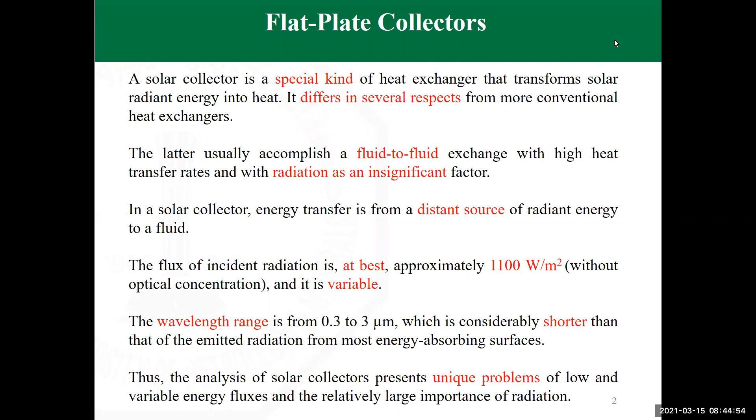Flat plate collectors can be designed for many applications that require temperatures to be heated up to values of 100 degrees centigrade above the ambient temperature. They have the possibility to use beam radiation and diffuse radiation. They do not require tracking, and that's why they need low maintenance, and they are easier to manufacture and cheaper in price. They are mechanically simple, as you will see.

It's just an absorbing plate and one or two covers and tubes, which are basically attached to the absorbing plate, or channels—tubes for heating liquids and channels for heating gases, water or air, for example. The major application of these units is for solar water heating, building heating, air conditioning, and industrial process heat.

Passively heated buildings, that's something you can see a lot in the West, in Europe as well as in the United States, where many houses have what they call a sunroom, which is a room where the roof and walls are basically made of glass. Why is that?

Because as solar energy comes, which is not as frequent as we have here in these places, the greenhouse effect would be there, and the sun would be a source of heat to heat these rooms. People would sit in these rooms in the winter to enjoy the sun and get some heating without using any devices. That's why they call it passive heating. You are getting heat without having to utilize or spend energy to generate it.

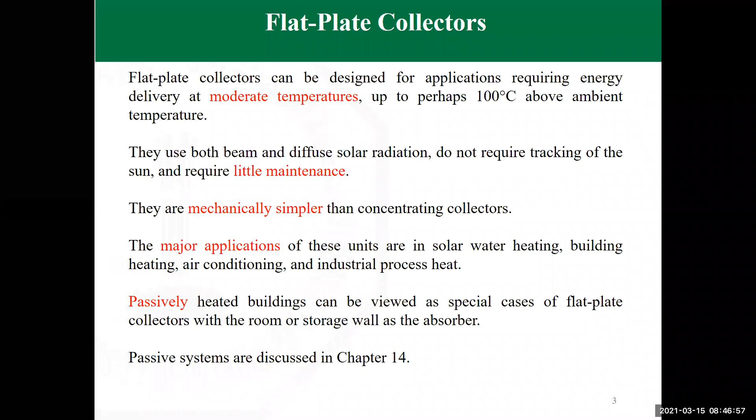As an application, passive heating systems can be seen in chapter 14 of the book. The importance of flat plate collectors in thermal processes will be treated in considerable detail in this chapter, so that we understand how its components function together, how heat transfer takes place, and what modes of heat transfer are there.

And why you are using several components - like, for example, what is the use of the covers? Why sometimes one glass cover, why two glass covers? These are things we are going to establish knowledge about, or at least discuss, in this chapter.

In many cases, for practical reasons, the analysis of flat plate collectors is simplified to a very simple form so that it can be used easily by engineers in terms of evaluating performance, design, or even comparing between different types or different manufacturers of flat plate collectors.

The last sections of this chapter are going to talk about testing the collectors, using the data, and some practical aspects of manufacture and utilization of heat exchangers. The costs are going to be considered in the chapters that talk about applications.

Probably toward the end of this chapter, I can share with you some of the specification sheets available for flat plate collectors, and even the kind of certificates issued by a third party - independent agencies that do the analysis or testing for the heat exchangers, and provide a sheet that is required from manufacturers as they sell their heat exchangers.

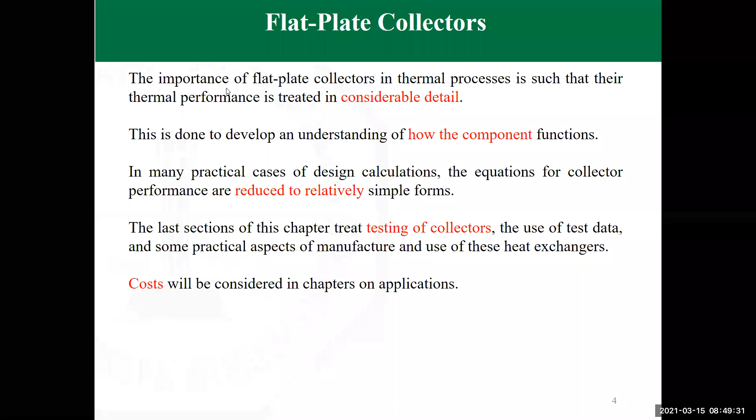Because of its heat, it receives heat by solar radiation. So the heat by radiation comes, passes through the glass, transmits through it, reaches the plate, the plate gets heated, and then it conducts heat by conduction through the whole plate. So the plate is going to have somehow uniform temperature, not exactly uniform - we'll look at that in detail.

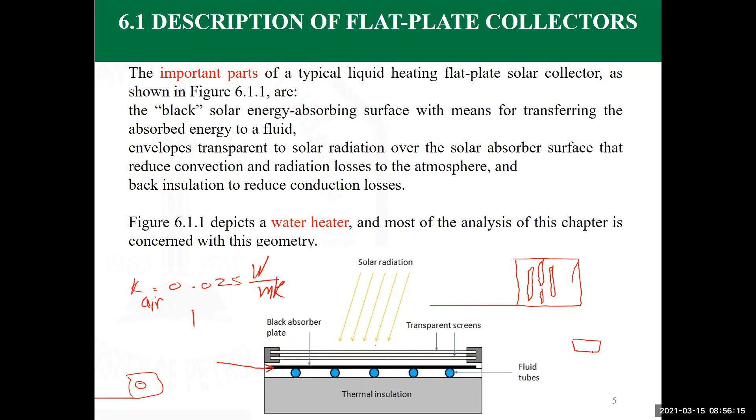Flat plate collectors are always stationary. You can seldom find, or cannot find, a flat plate collector on a tracking mechanism. Tracking is costly, and whenever you think of flat plate collectors, you think economically that we need the best operating system at the lowest price possible. So you mount the flat plate collectors on a fixed position on top of the roof, where you optimize the orientation.

For example, if you are going to put it here, you make it face due south, at an angle equal to the latitude of the city. This is the best position that you can put it in. It's not the best position every day of the year—it may change from season to season—but for all year long, if you need to fix it, that would be the best position to remain at.

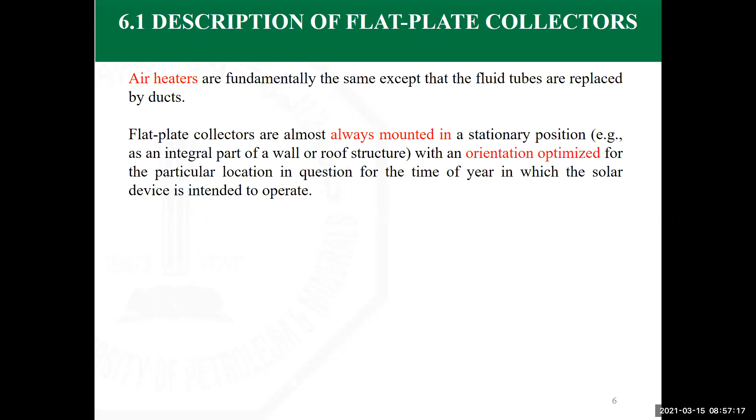The analysis that we do, we always assume that we have a steady state condition, although the nature of solar energy is not. If you follow the solar energy flux, it starts from zero at dawn, reaches the maximum at solar noon, and then declines again until sunset. But it is normally cut into intervals of 1 hour, and we'll be talking about that in details. So normally we consider an energy balance on a steady state basis, which provides a useful energy gain calculation, estimation of the thermal losses and optical losses from the solar collector.

Up to chapter 5, we have used equation 5.9.1 that calculates how much energy is absorbed by a collector per unit area, which is the expression S. To remind you, S has 3 components: one is the beam component, one is the diffuse component, and the third is the ground reflected one. We had a detailed example, maybe 2 examples, in calculating the value of S. This is basically the foundation to what we are doing here.

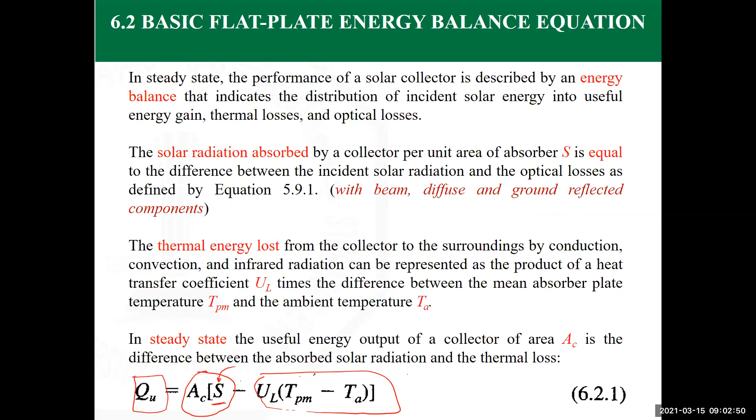We try to express things in terms of values that are easily measured. For example, how much is the water inlet temperature? You can put a thermocouple in the water before it gets to the pipe and after it leaves the solar collector, so you know the temperature in and temperature out of the water.

We are going to define a heat removal factor that can be evaluated analytically from basic principles as well as from experiments. We're going to put this equation in a form that provides the useful energy as a function of the fluid temperature and the heat removal factor.

This equation is an energy rate equation. In the SI system of units, it provides Q in watts, which is joules per second. S, as we've seen in previous chapters, can be calculated in watts per meter square. The overall heat transfer coefficient is in watts per meter square Kelvin, or equivalently watts per meter square centigrade.

The point here is about changes in conditions - for example, how does the solar flux change? It does not change second by second; it's better expressed as changing hour by hour, so we take the average over the hour. In previous chapters we talked about the daily average and the hourly average, not the average per second, because that doesn't make sense.

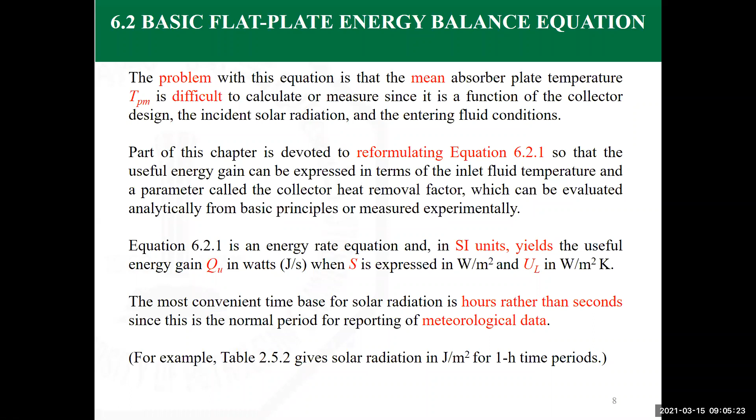So it's as if you're averaging your measurements over a period of an hour. The time basis for solar applications is taken as an hour rather than a second. To do that, we multiply part of the equation - the part involving the overall heat transfer coefficient times the temperature difference - by 3,600, so that it's provided on an hourly basis.

The hourly basis is not the SI standard, but it has become a convention to use with solar collectors, and it's been accepted for that use. Otherwise, we would just take the values and integrate over an hour, which amounts to the same thing. So we don't really use a time period less than one hour.

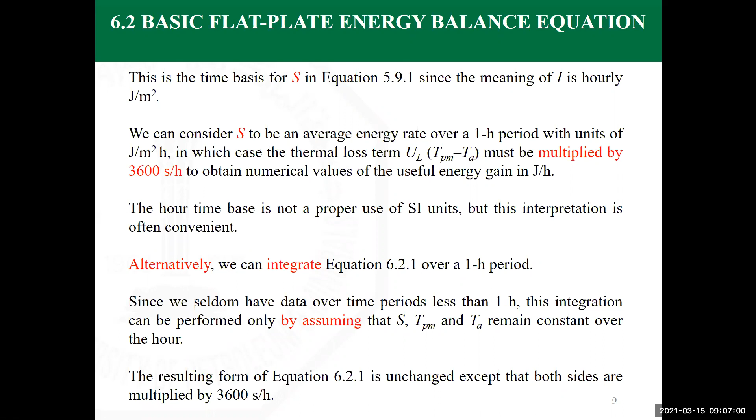This is because one hour is the smallest interval at which weather conditions - temperature, wind speed, or solar flux - are measured. So the integration can be done assuming the energy absorbed by the plate S, the plate mean temperature TPM, and the air temperature remain constant over the hour period. The form of the equation is the same; we're just adjusting it so that instead of being per second, it's per hour.

To avoid confusion, since we normally use Q in watts or kilowatts - joules per second - to give the same meaning of heat transfer rate on an hourly basis, we use the expression Q dot U or QU, where U stands for useful energy. So when we see this with solar collectors, we understand it has been calculated taking the time domain as one hour.

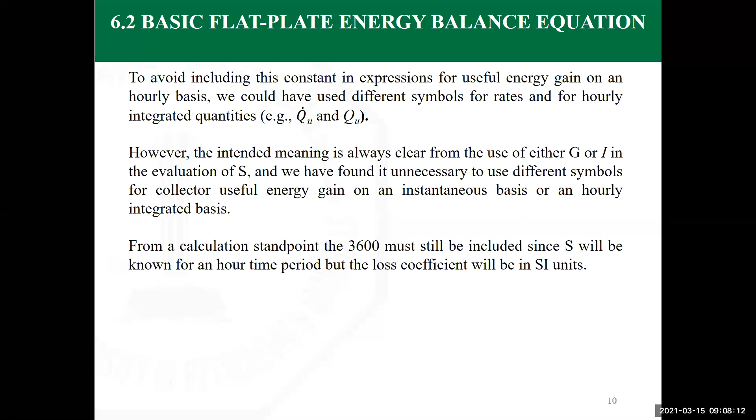That's why we don't use the expression of G or I in this equation, but use the expression of S. We know from previous calculations that S is the amount of solar radiation absorbed by the absorbent plate in the flat plate collector. That explains why the 3,600 figure is going to be found in many of these equations. The alternative, as I mentioned, is to use integration.

For example, what we see here is a definition of the efficiency of a solar collector. This is a quite important parameter that we use for solar collectors. Actually, the specification sheet for any flat plate collector you buy, before you buy it, you are going to look at it and look basically at the expression of the efficiency. This is our educational basic mathematical formulation of the efficiency of the collector.

That is the integral of QU with respect to time, over the integral of the incident energy, GT solar energy, the irradiation with respect to time. So on the top we're talking about the useful energy, and in the denominator you have the amount of energy in to the solar collector. By definition, efficiency is energy out, useful energy out, divided by the energy in.

But when you look at existing flat plate collectors, you'll find it given in two forms. Either the efficiency is given as a straight line approximation, where you're given the intersection with the y-axis and the slope, or it can be given in terms of a three-term polynomial. It's all up to you to use either one of them.

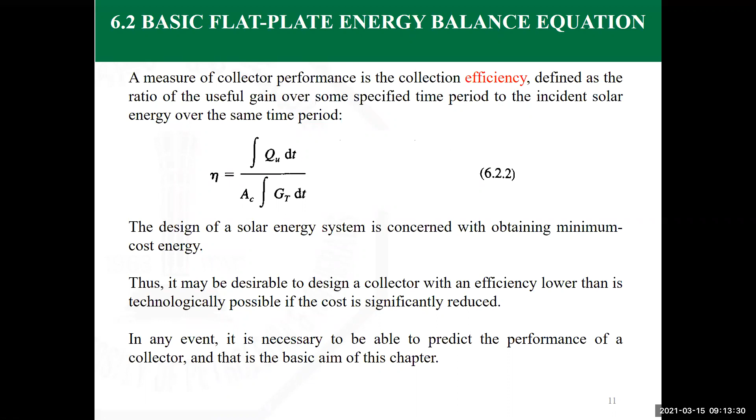If we are able to reduce the convection by reducing the distance between the plates, when we are talking about convection here, we are talking about natural convection. And natural convection is basically given as a function of Rayleigh number. Rayleigh number is a function of the distance between the plates. If the Rayleigh number is below a critical value, the critical value may change from book to book. Some books would say it's 1,000, some would say it's 1,800. So anyway, if you are going to go for a Rayleigh number less than the critical value, then you are suppressing the convection. Convection will not be effective, and it's going to be replaced by conduction.

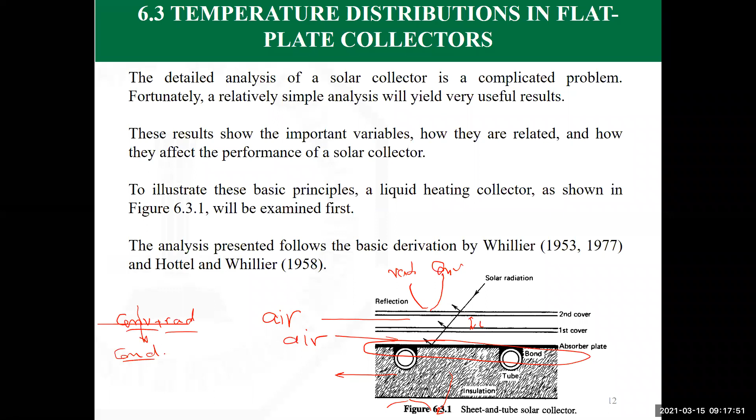I'm not sure if you have gone through this problem. The last time I taught heat transfer was several years ago, so I'm not sure if this problem is still being taken as a part of the homework anymore or not. But it's interesting to look at this.

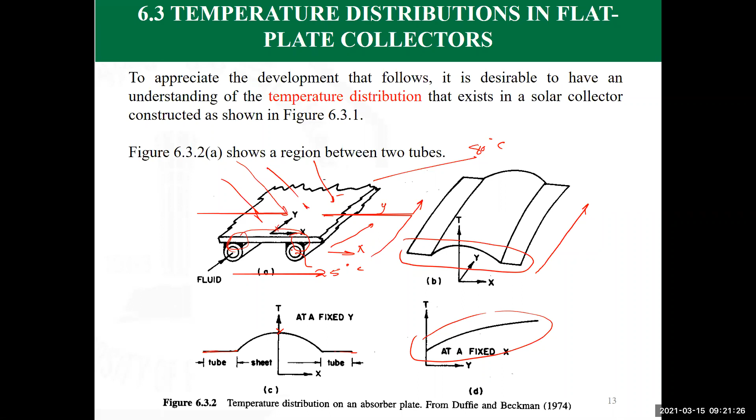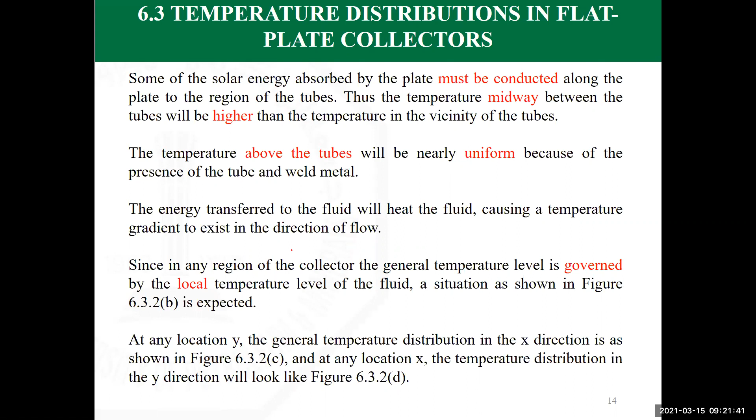This slide is basically talking about the things I just mentioned, in terms of how the heat is being distributed and how the temperature is changing within the plate and in the tubes. To do the modeling, as usual, a model means a mathematical way that you can represent a physical process. The physical process here is having a solar collector and a fluid that will be heated by the energy coming from the sun. To convert this into equations, as you've seen previously with the first law of thermodynamics expression written for flat plate collectors, we need some assumptions to make our analysis easier.

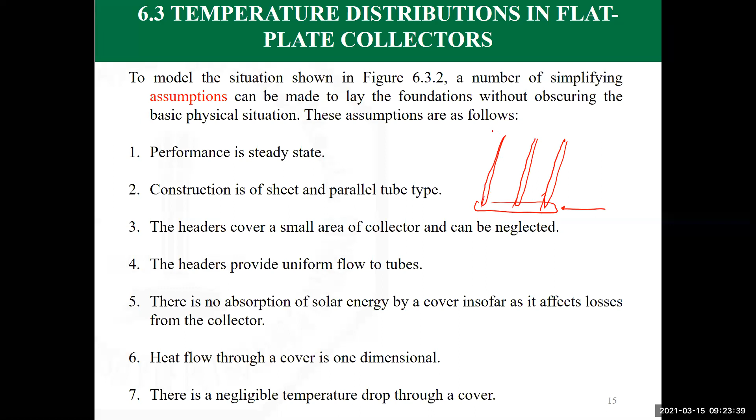There are headers, because when we talk about tubes extending from one end of the solar collector to the other, this is one tube, this is another, and this is a third tube. How does the water come and leave from the tubes? There should be a header here. These headers receive the cold fluid, distribute it into the tubes, and there is another header that collects the hot fluid and gives the product. This is typically what you see in a flat plate collector.

Now we are going to neglect the changes inside the headers, as if the tubes are directly receiving the flow of water in and taking the flow of water out. The headers cover an area which can be neglected because it's too small, and the headers give uniform flow to the tubes, meaning the flow rate and temperature here, here, and here are equal. The flow rate leaving is equal, and the temperature is the same leaving from all the tubes.

There's no absorption of solar energy by the cover insofar as it affects losses from the collector. So the cover, meaning the glass cover, is not really contributing as an absorber of the solar energy.

The heat flow through the cover is one-dimensional. So if this is the flat plate collector, the energy falling into it is falling in one dimension. We are not going to consider X, Y, and Z. It's only coming in the Z direction.

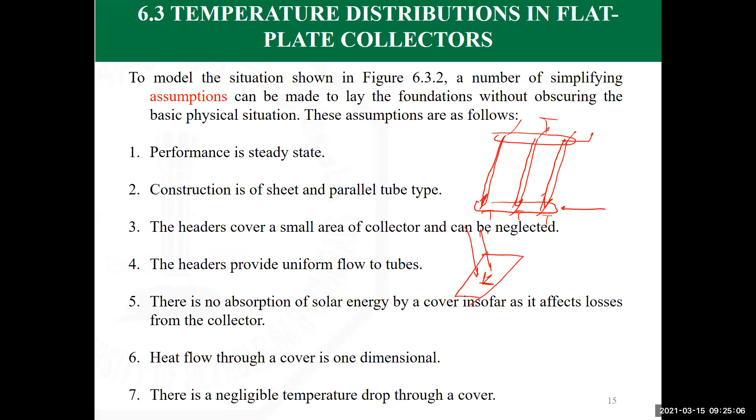There's negligible temperature drop through the cover, so the cover is assumed to be uniform in temperature. The temperature is not varying from one location to the other.

The covers are opaque to infrared radiation, so they are not allowing the long wavelength radiation from the absorbing plate to escape to the outside. This is the greenhouse effect.

One-dimensional heat flow through back insulation. In the insulation that we have in the back, if this is the flat plate collector cross-section area, and here's the insulation, and these are the tubes covered by the absorbing plate, then the heat transfer here is moving in one direction. So it's not a 2 or 3D case in terms of heat transfer, and that's for simplicity.

The sky is considered as a black body for long wavelength radiation at an equivalent sky temperature. This is for the heat losses from the upper surface to the sky, while assuming the sky is at a uniform temperature. That could be the same as the outside air or ambient temperature, or different. It depends, and we'll see in this chapter how the differences can be almost insignificant.

Temperature gradient around the tubes can be neglected. We assume uniform temperature in and around the tubes.

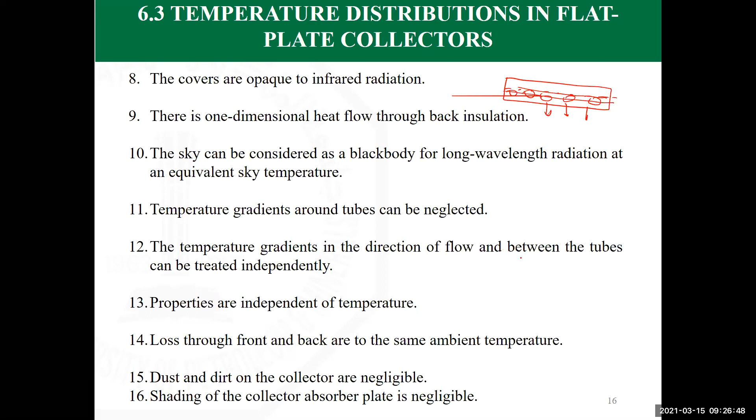Temperature gradient in the direction of flow and in between the tubes is treated independently. So that's something we're going to deal with alone. A part of it is what I just mentioned, that in the direction of flow, normal to the paper here, this is the inlet. If I put like a 3D figure of it, there are tubes here, and in this direction there is an increase.

We still can't hear you. Can you hear me now? Yes, yes, sorry, it's just all of a sudden that the connection has been lost. I just found it when it's trying to reconnect. Where did you hear me up to? Which one of these items that we're discussing? Are you following?

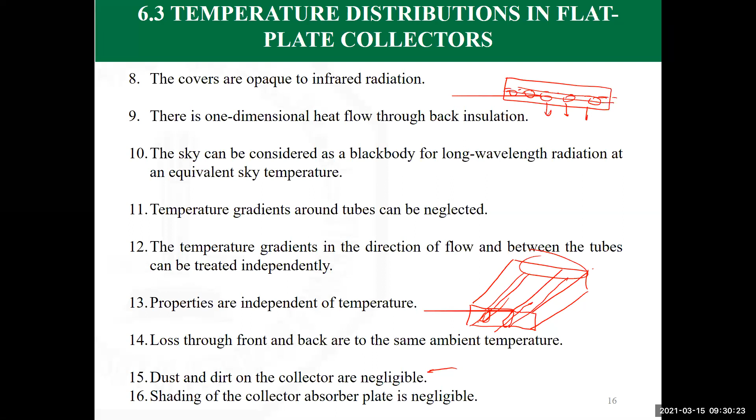We neglect the effect of dust and dirt on the collector, because we know if the collector gets dusty with sandstorms, it reduces the amount of energy falling in. That's something we're going to neglect, assuming they are always clean glass surfaces. Also, we're going to neglect the effect of shading, meaning we assume the solar collectors are placed in a location where they are not covered by shade from any adjacent buildings or trees as they are operating.

The kind of equations that we are going to have are basically coupled and nonlinear equations, which in many cases would require to be solved in a platform, in a programming, for example by writing in Fortran or in C or in Java or whatever computer language that you master. And this is normally done by approximations of converting the nonlinear terms into linear ones.

This is what we call linearization of the equations, discretization of differential equations using like Newton-Raphson iterative method for solutions. And there's a number of computer programs that are available that can solve system of equations. I mean, there are so many of them.

An example is the Engineering Equation Solver, EES, where actually the one who developed the EES is Klein, who is one of the most significant authors of articles talking about solar collectors. Engineering Equation Solver is a unique program when it comes to applications of thermal sciences, including this course, definitely, because the properties are built in.

Actually, it has so many functions that we need for heat transfer analysis that are built in, and it is easiest to utilize in terms of equations writing. All you have to do is write number of equations equal to the number of unknowns at any order, and you don't have to worry about the details of the solution.

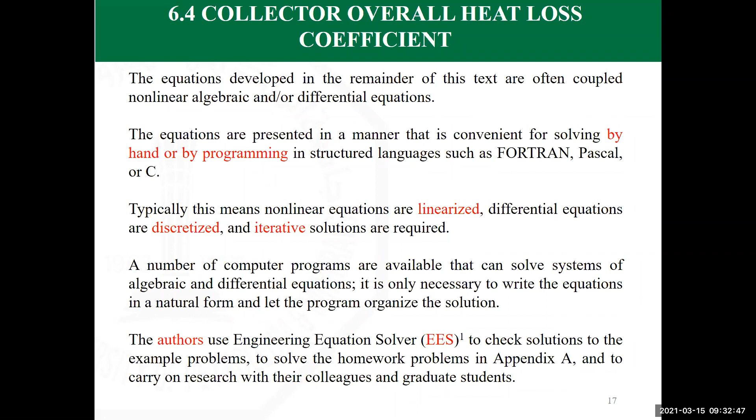But just quickly, if we are going to talk about conduction, heat transfer conduction is governed by Fourier law of conduction. The integrated form of Fourier law of conduction is saying that Q is equal to K A into delta T divided by the length L. So we tend to put this as delta T over R conduction, and R conduction here will be L over KA. So that's a representation of conduction.

When we come to convection, Q is by Newton's law of cooling, HA into delta T. Then it can be given as delta T over R convection, and R convection is 1 over HA. So this is basically the way that we are going to represent thermal circuits.

When it comes to radiation, we know that, or we have seen in chapter 3, that we can write radiation as Q is equal to H radiation into delta T, again into the area. So when you are talking about radiation resistance, it will be 1 divided by HR into A. So this is the kind of expressions that we are going to consider here for the heat transfer modes that would make it easy.

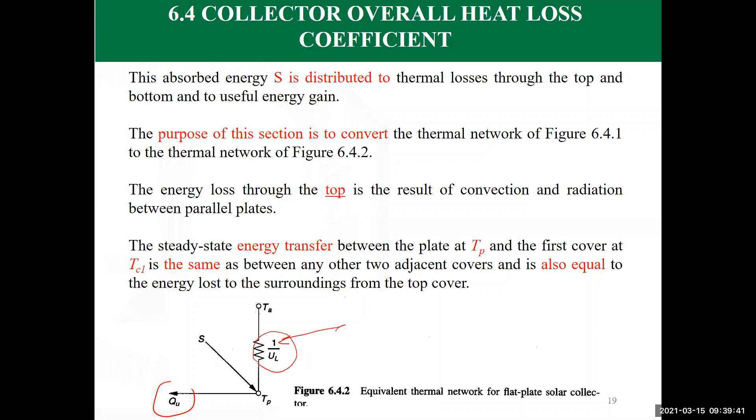So what we need to do is to convert this number of thermal resistances that we see here in this figure into this simplified form, where only one expression, a lumped expression, is going to talk about the kind of losses resulting from the solar collector.

What we're doing here, we're utilizing the information that we have gained in chapter 3, the revision of heat transfer course, into several parts that we have.

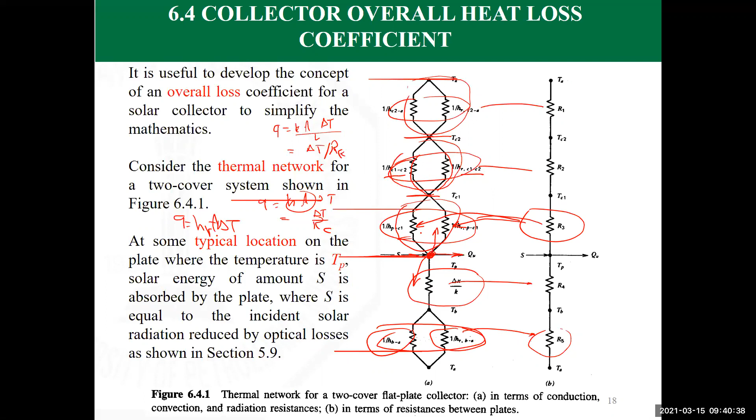And this is the convection heat transfer by natural convection from the plate to the surrounding. So this is Newton's law of cooling, and this is the Stefan Boltzmann law of radiation. And these two are taking care of the energy loss from the top of the absorbing plate to the glass.

H by convection from the plate to C1 is the convection heat transfer coefficient. To determine this value, you need to get back into the Rayleigh number calculation, which is a function of how much is the distance between the two plates, calculate the Rayleigh number, and then go to the correlation of Nusselt number as a function of Rayleigh number, calculate the Nusselt number. Nusselt number is HL over K, then you can get the heat transfer coefficient H.

So just to make a long story short, you're going to follow whatever we have covered in natural convection to determine the value of H here. And then when it comes to radiation, we're going to apply the Stefan Boltzmann law of radiation. These properties are known: the value of epsilon for the plate and epsilon for the cover are going to be known. And then you're going to apply it here and calculate how much are the losses from the top of the absorber plate to the first layer of glass.

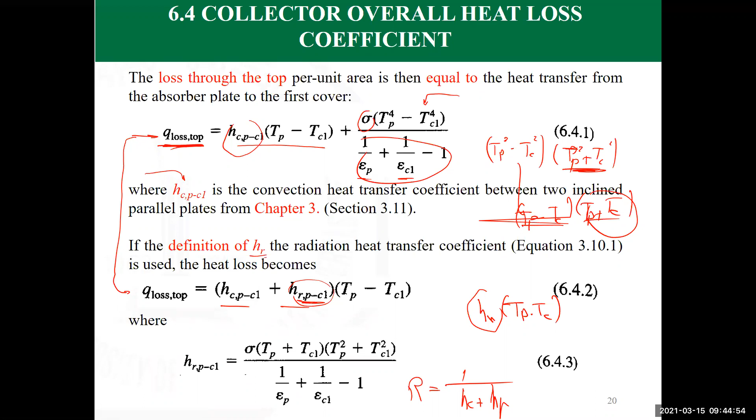Similarly, you can do the same for the others. So the expression from plate 1 to plate 2 can be written in a similar manner. From the upper plate, plate 2, to the surrounding, again convection and radiation, it can be written the same way. So we're trying to make our life easier by finding simpler expressions for the combination of convection and radiation from one plate to the next.

Okay, any questions so far? I've not been interrupted since I started, so shall I assume that you understand? Yes, doctor, it is pretty much clear, at least for me.

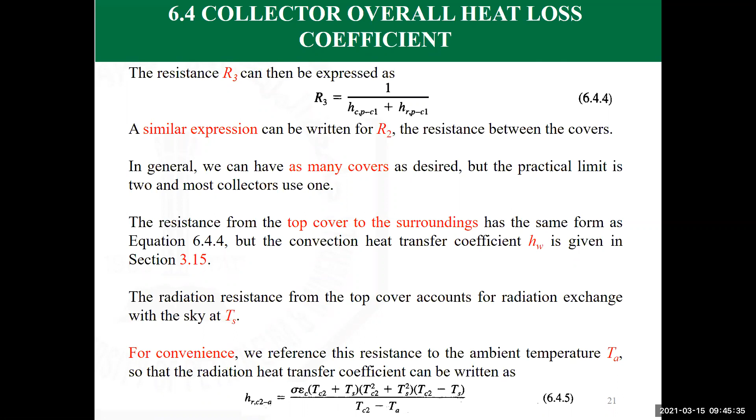So here we're talking about cases where the expressions of heat transfer modes are going to be represented. The same thing can be given for R2, R1, and R3. Accordingly, the combination of resistances on top of the plate - if this is the plate, P - we have resistance from the plate to cover 1, then from cover 1 to cover 2, and then from cover 2 to the surroundings. We are talking about 3 resistances. Combining these 3 resistances becomes easy with an overall heat transfer coefficient.

So we can use an expression of the overall heat transfer coefficient to represent these combinations of convection and radiation resistances on the first 3 layers. The 3 layers are, again, from the plate to cover 1, from cover 1 to cover 2, and from cover 2 to the surroundings. Then an overall heat transfer coefficient is going to make our life much easier.

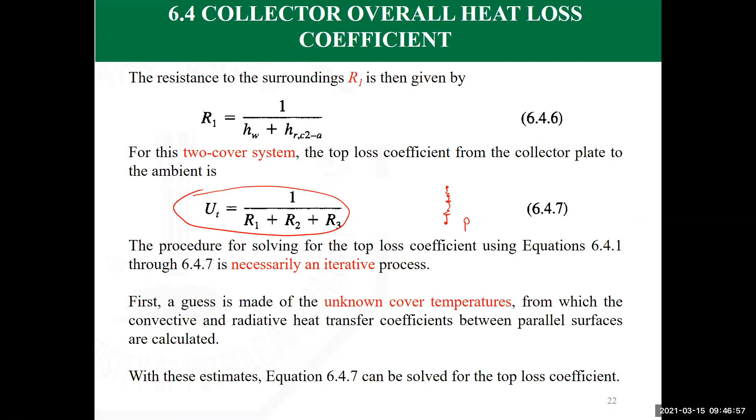And generally speaking, the heat transfer rate, when you write it, will be a combination between any two plates of these. T of one plate minus T of the other plate can be given by an overall heat transfer coefficient times the difference in temperature, over the combination of H convection and H radiation.

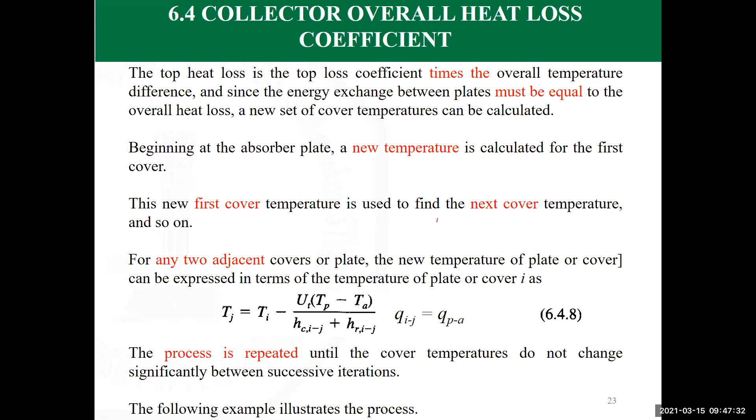And it's an iterative process that I think we can begin with in our next class as an example. So next class we are going to start with this example. After today, we had some sort of a long introduction to the chapter, and after that we are going to talk about any increment of the information, followed by an example so that it can clarify the point we are discussing.